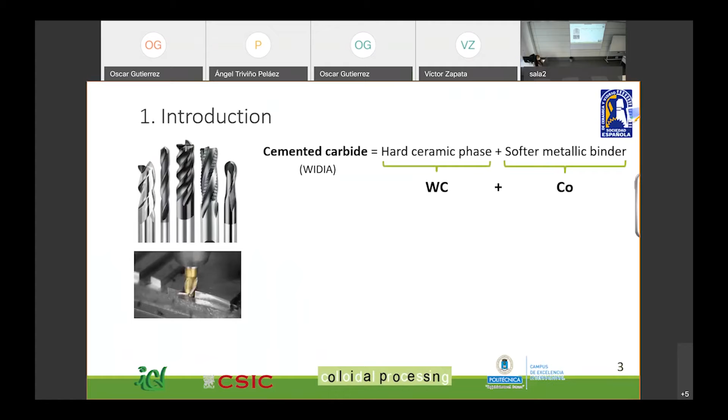The problem, as Alvaro has mentioned before, of cobalt is the highly reported toxicity. So actually, we are immersed in the search of tungsten carbide-based materials with similar mechanical properties, such as high hardness, high wear resistance, or high toughness. And that's why some other transition metals have been proposed for that reason.

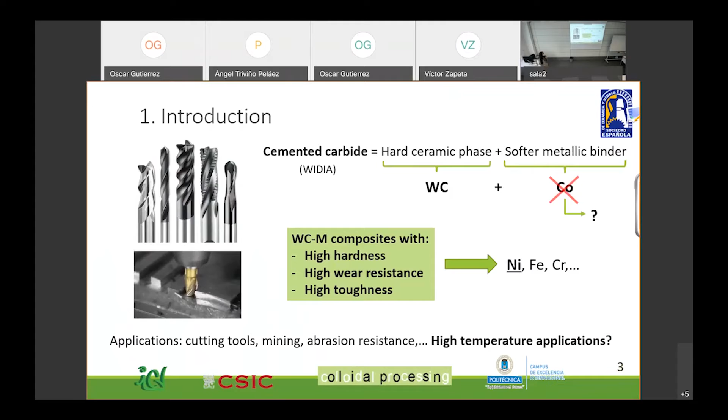Traditionally, cemented carbides applications have been linked to cutting tools, mining, or abrasion resistance, but due to their good mechanical performance under extreme conditions, they can be good candidates for high temperature applications.

These kinds of materials have been traditionally processed by dry techniques, but what we propose here is the colloidal processing of our materials, which basically consists of the addition, in our case, of ceramic or metallic powders to prepare suspensions. And to achieve a better dispersion of our particles in suspensions, we sometimes use dispersants.

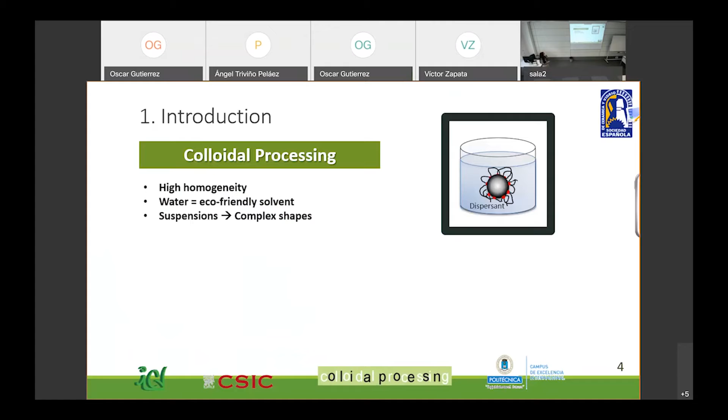The main advantages of colloidal processing are these 3: a high homogeneity of the mixture that we can achieve, the use of water as an eco-friendly solvent instead of any other organic solvents, and since we work with suspensions, we can achieve really complex shapes in our final material.

Traditionally, tungsten carbide materials have been sintered under really extreme conditions, and actually the results weren't that good in terms of density or porosity. So the solution in this case would be the addition of a metallic binder. In this case, in our project, we decided to use 3% in weight of nickel.

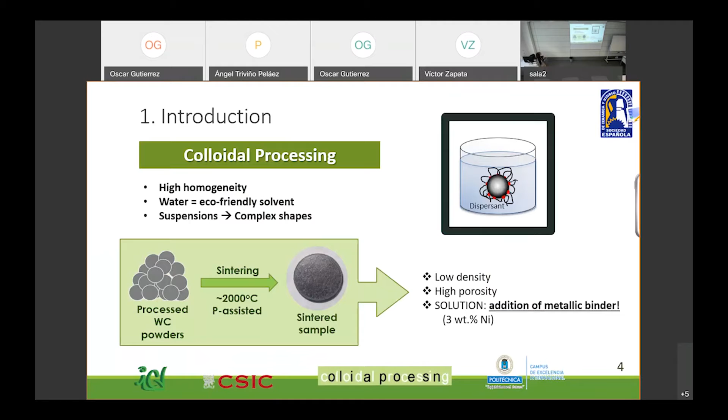So after this introduction, we would say that the main objective of this project, of this work, is the colloidal processing of tungsten carbide-based materials through the addition of small quantities of metallic nanoparticles as alternative binders.

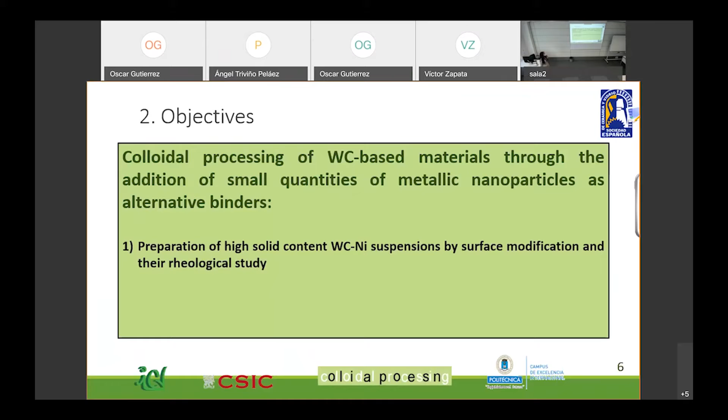How did we do that? Well, first, by the preparation of high solid content tungsten carbide nickel suspensions through surface modification and rheological study. After that, by the sintering of the processed composites by hot press sintering. And finally, we studied the microstructure and the mechanical properties of the final materials.

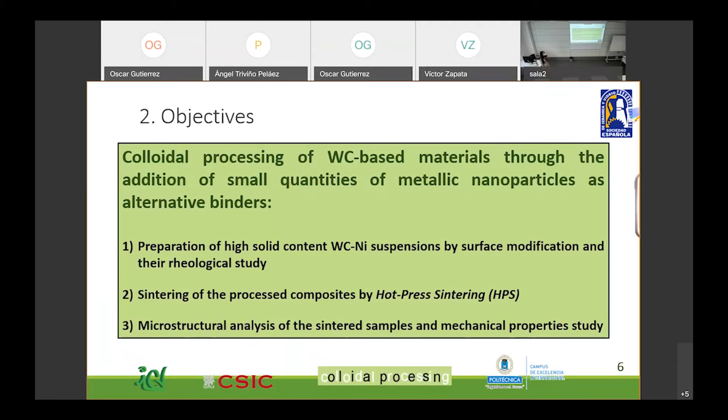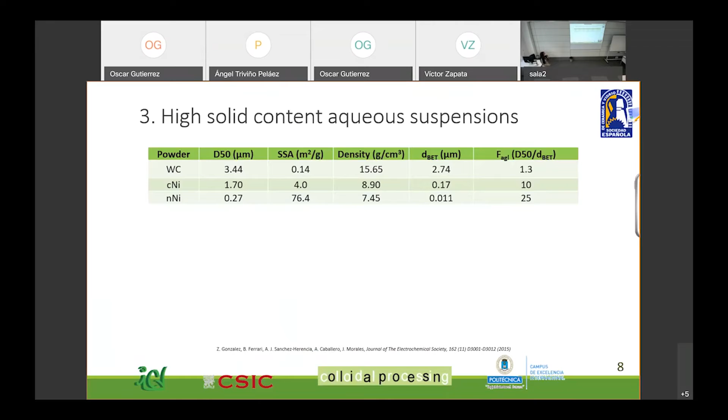We also use 2 different types of nickel. The first one, which is a commercial nickel, that's why we call it C-nickel. And the second one would be a nanometric nickel we synthesized in our lab. Here I attached the reference.

So actually both of the powders are, one micronic and one nanometric in particle size, but the difference is the size of the nanometric nickel powder is much smaller. It can also be appreciated that there is a huge difference in the specific surface, which is really big for the case of nanometric nickel.

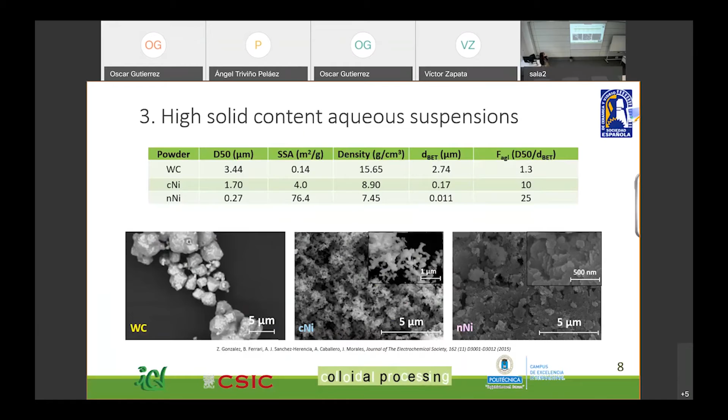There are also significant differences between the shape of the particles. I don't know if you can see it very well, but here they are kind of stick-shaped particles in the case of commercial nickel, and in the case of nanometric nickel, the particles are rounded and flat.

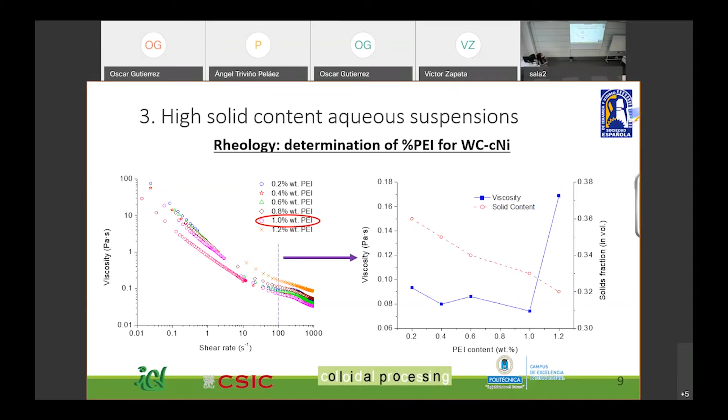The first thing we did was carry out some rheological tests to determine the optimal amount of dispersant to add to our suspensions. We decided to use polyethylenimine, or PEI, an organic polyelectrolyte, to stabilize our particles in suspension. We tested different proportions of PEI, and as we can appreciate here, there is an optimal amount of PEI, which is 1% in weight. From that point on, the viscosity of our suspension shoots up, which is not desirable for suspension preparation.

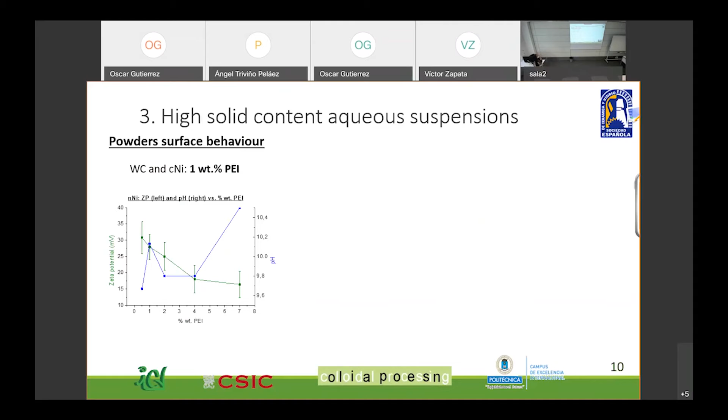So we decided to confirm this data with powder surface behavior studies by measuring the zeta potential of our particles in suspension. When the zeta potential value stabilizes, we consider that we've found the optimal amount of dispersant for our formulations. For the tungsten carbide powder and commercial nickel powder, we determined again that 1% of this PEI polyelectrolyte should be added to our suspensions. But in the case of nanometric nickel, the optimal amount, determined where the zeta potential value stabilizes, is 7% of PEI in weight.

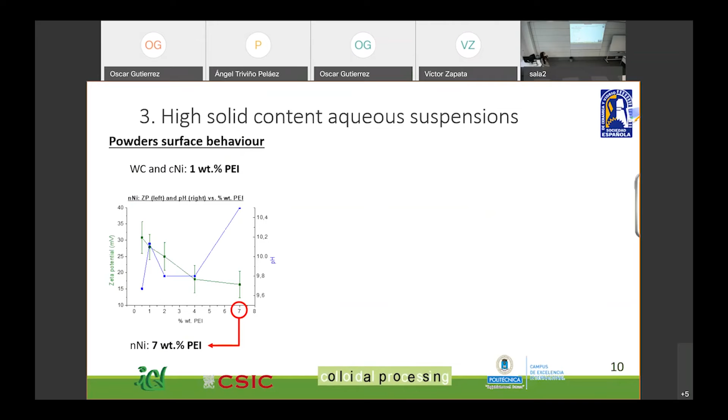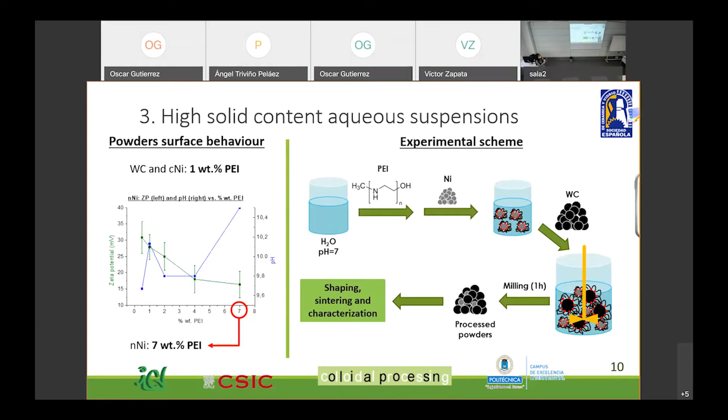Here is a general scheme of the experimental procedure we carried out in the lab. After the addition of the dispersant, nickel powders, and finally our base material, tungsten carbide powders, were milled for an hour, and after that the processed powder was dried, ready for the next shaping, sintering, and characterization steps.

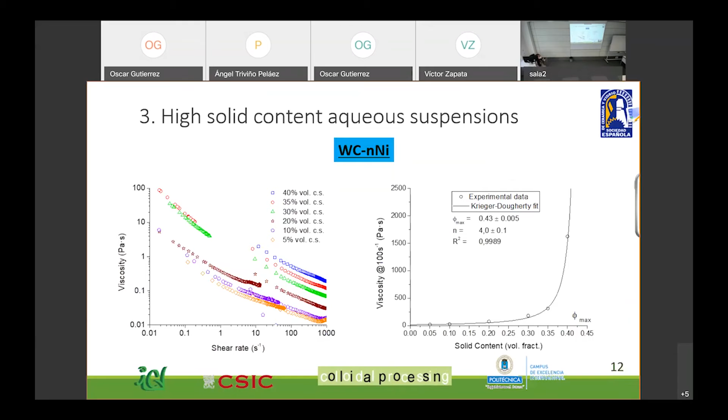After the milling step, we also carried out rheological tests, but this time to determine the optimal amount of solid content for our suspensions. We did this experiment for the mixture with tungsten carbide and commercial nickel, and the same for tungsten carbide and nano nickel. In both cases, we determined there is a 40% in volume, which would be our optimal solid content. From that point, the viscosity of the suspension increases too much.

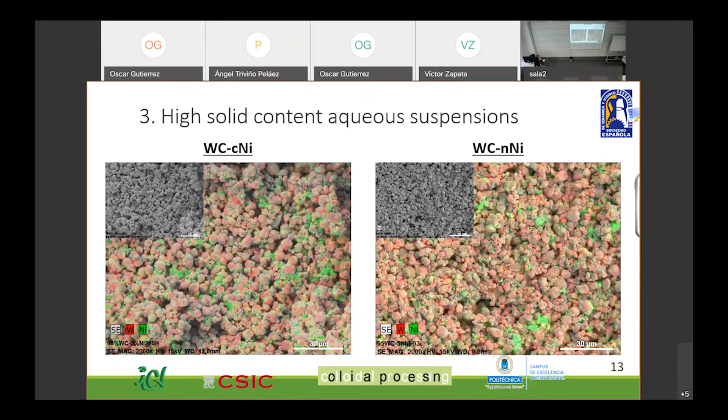From that point, the powders were dried, and here is an EDX analysis of the processed powder. In the mapping analysis, shown in green, we can appreciate that nickel powders in both samples are very well dispersed.

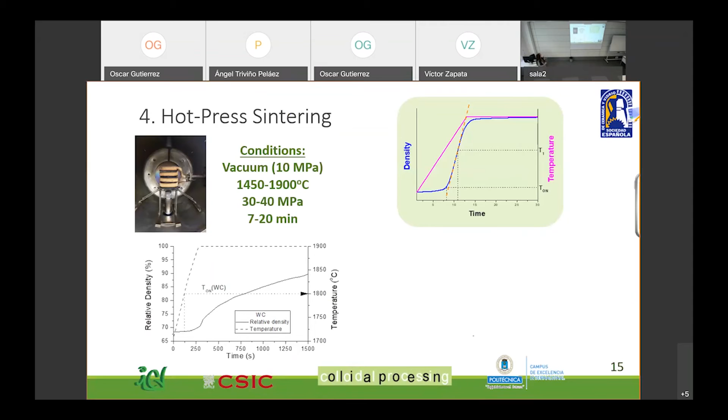Under these criteria, we first carried out a binderless tungsten carbide sintering process, and also did the same for the mixtures with commercial and nano nickel. As we can appreciate here, it's difficult to see because the graph has been shortened, but in this case both sintering times and sintering temperatures are really long and high.

This didn't happen for the cases with the mixture with nickel, especially with nano nickel, whose results show a clear improvement, because the sintering times are much shorter and the sintering temperatures are lower, by almost 500 degrees.

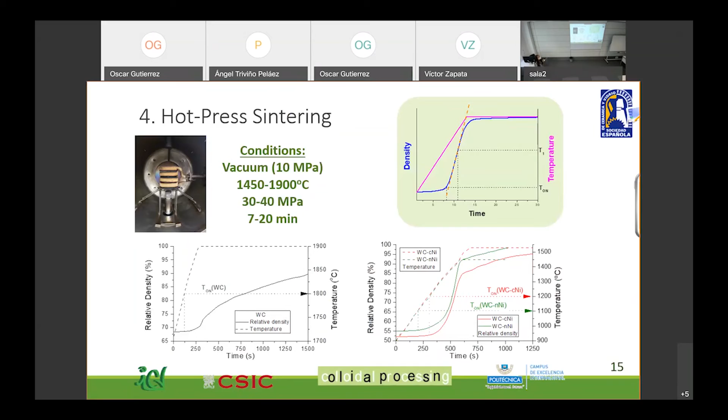In terms of density, we could also appreciate there are huge differences between them, achieving even less than 90% in the case of binderless tungsten carbide.

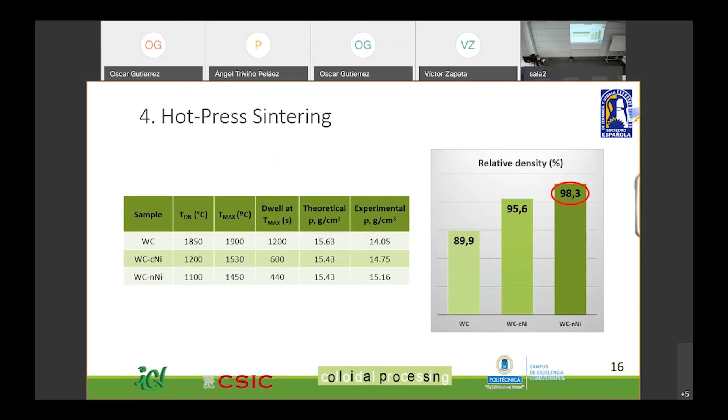But in the case of the nanonickel synthesized by us in our lab, this would be even higher than 98%, which is very good news, actually.

After that, we decided to carry out a microstructure characterization. Here I show you some polished cross-section surfaces of our samples, and as we could expect in the case of binderless tungsten carbide, here maybe we can see it better at further magnifications.

There is huge porosity present all over the microstructure in this case, and this is improving when nickel is present, especially in this case where porosity is even not noticeable.

We can also notice there is a huge difference between the mean grain size in these three samples, and they are actually very, very small in the case of the mixture with the nanometric synthesized nickel.

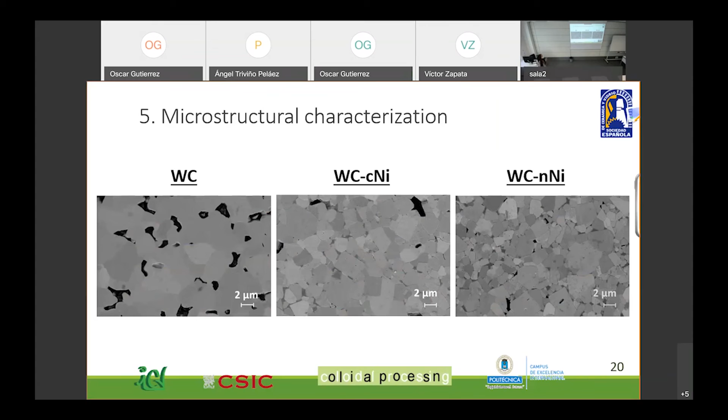formation or solid solution in these three samples. And finally, just to finish with the microstructure characterization, we carried out some EDX mapping analysis on this polished cross-section of our samples.

As you can appreciate, in both mixtures we can see that nickel is just located on the grain boundaries in both cases.

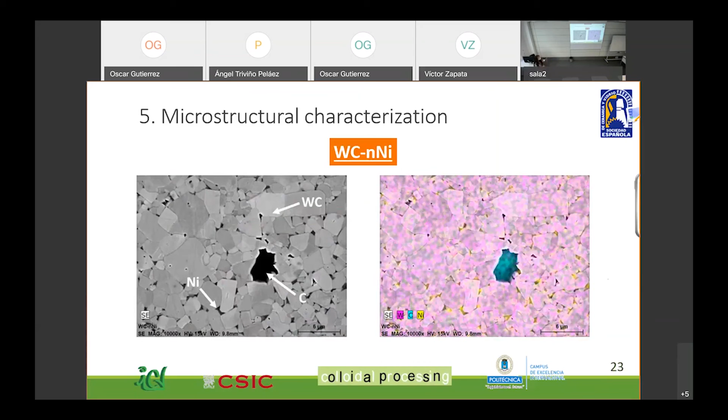And there are some graphite precipitates, these agglomerates, all over the microstructure.

So we carried out some mechanical property tests. In this case, we used some indentation tests to measure both hardness and toughness for our materials.

So with 1 kilogram Vickers indentation, we measured hardness, which gave some remarkable results.

In the case of tungsten carbide, we had a very low value of hardness, probably due to all this porosity, but it just improves with the addition of nickel, especially for the case of metallic nanonickel.

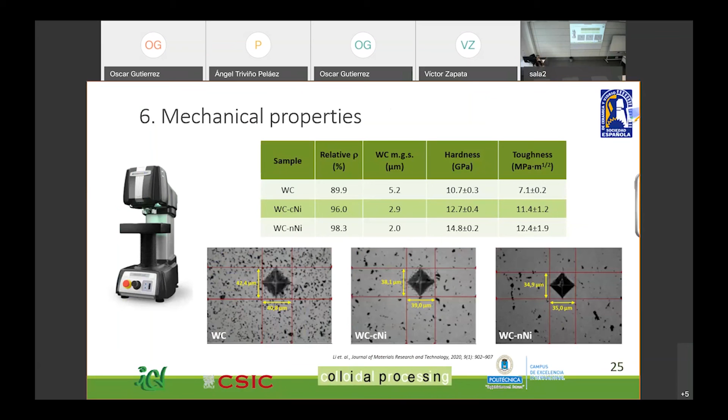And in the case of toughness, we did a 10 kilogram indentation test, and the results have the same tendency as in the case of hardness.

So I would say that the main conclusion of this work is that the addition of small amounts of metallic nickel is proved to be a successful binder, decreasing sintering times and temperature, as well as increasing the density of the final sintered material.

Tungsten carbide-based suspensions with high solid contents are colloidally processed, with the addition of just 3% in weight of nickel of two different types, a commercial nickel and a nanometric nickel synthesized in our lab,

but also the binderless tungsten carbide material as a reference. Rheology just revealed that the optimum amount of dispersant was 1% in weight, and solid content for both our suspensions were

40% in volume content for the preparation of our slurries, and they achieved a greatly homogeneous dispersion of both types of nickel.

By hot press sintering, the density of the final sintered samples reaches more than 95% for the mixture with commercial nickel, and even more than 98% for the mixture with nanometric nickel.

In the microstructure analysis, metallic nickel is located, as we appreciated on the micrographs, all over the grain boundaries, while some residual carbon precipitates under sintering conditions all over the microstructures.

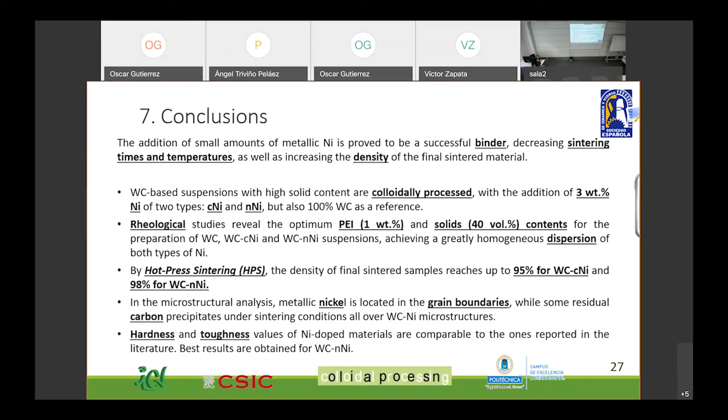And finally, both hardness and toughness values of nickel-doped materials are actually comparable to the ones reported in the literature, but the best results were again obtained for tungsten carbide nanonickel.